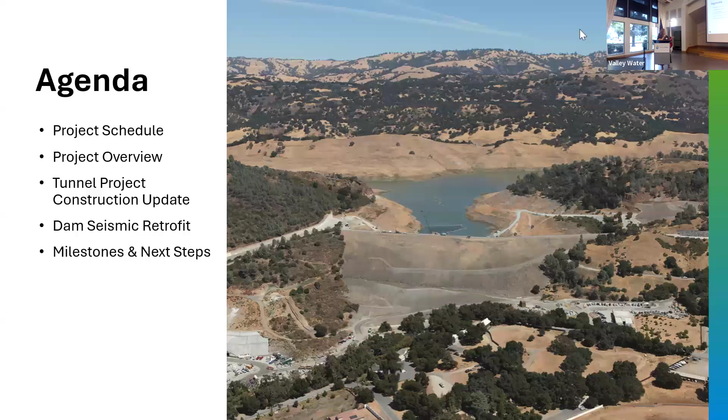Thinking about that delay. Yeah.

Okay, so this is a great slide to start off with. It helps illustrate the various projects and their relationship. It's also a great slide to start off with because it gets a lot of the acronyms out of the way very early in the presentation. And we really love acronyms on this project. We love acronyms so much we put acronyms in acronyms. So starting on the right, we have this grouping. This is the FERC Order Compliance Projects. That's that acronym within an acronym.

FERC, which is the Federal Energy Regulatory Commission. They have jurisdiction over Anderson Dam due to a hydroelectric facility that was constructed in the 80s. So in 2020, they issued an order to Valley Water to drain Anderson Dam, and that's below the 60% capacity that was already restricted to by the state. And we were also required to construct our tunnel project as quickly as possible. And that's how we got the Anderson Dam Tunnel Project.

We had to break that out from our main seismic retrofit project. And that's the project that you see in construction now. So when you're driving on Cochrane Road and you see construction, that's the Anderson Dam Tunnel Project, or ADTP, as we like to call it. Next, we have the Coyote Creek Flood Management Measures. In advance of ADTP being completed, we need to prepare Coyote Creek to receive additional capacity in areas that would have been susceptible to flooding.

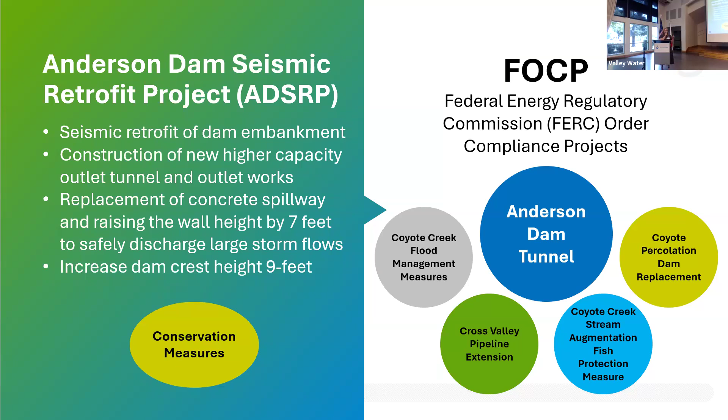So this is a summary of our program schedules for those various projects, starting in 2013 with the design of Anderson Dam. And the star represents today's date along with that vertical line. Of course, in 2020, that's when we had that major shift where we had to break out all of those projects for FOCP, including the new tunnel project, which was broken out of the ADSRP project. So since we last presented to you in February at our last public meeting, the Coyote Percolation Dam project, the Coyote Creek Flood Management Measures project, and the Cross Valley project have all completed construction and have wrapped up. So that's major progress. And the Chillers project will be completed in early 2026, and the Anderson Dam Tunnel Project will be completed in November of 2026.

So focusing on ADSRP, we're moving through our procurement process. We pre-qualified 3 construction contractors that specialize in dam construction. And next week on Tuesday, we'll be going to the board to ask for authorization to invite those 3 contractors to bid on our construction contract. So that's major news. That's a huge milestone for the project. And what that means is that we've wrapped up our final design and we've submitted our bid package. So you see the design moves past today's date, and the reason for that is we anticipate that the contractors will have questions about the design that our designers will have to respond to. So we plan to award the construction contract in July of 2026. We'll start construction in January 2027, and construction will wrap up in December of 2033.

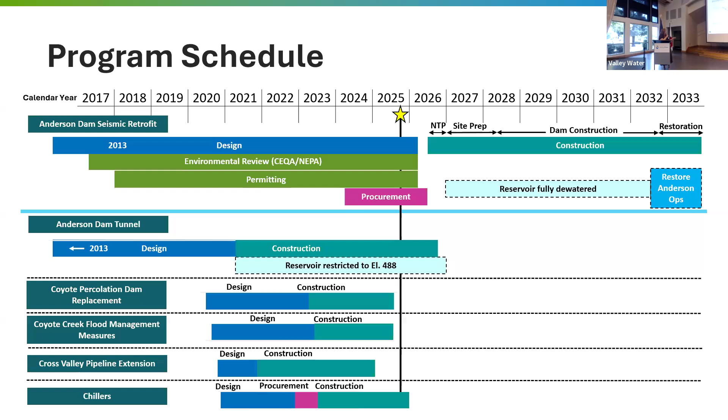So this graphic illustrates the major components of ADSRP that I've already explained. In the center, that full figure is the replacement embankment dam. And the reason why we're replacing that is because when it was built in the 1950s, it was built using liquefiable material in the upstream slope and foundation.

So in the event of an earthquake, it has the potential to experience liquefaction and settle. And if the reservoir were full, it could potentially overtop. And because this is an earthen dam, it has the potential to experience erosion and potentially experience catastrophic failure. So that's why we're replacing the dam. And I will walk you through what that construction sequence looks like later on in this presentation.

The top of the slide is our spillway that is being extended through the unlined portion. That'll be the higher capacity spillway. We also have 2 new independent outlet work systems in the blue and purple that will be able to move water out of Anderson Dam. The low-level outlet work system is our primary system. We'll be able to use that to move water both into the reservoir and out of the reservoir. We'll also be able to use that to put water into Coyote Creek as well as our water supply system. The high-level outlet works will be used for emergency drawdown.

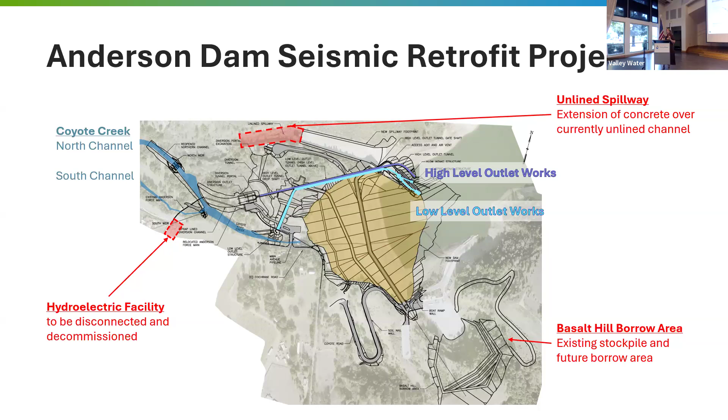At the bottom is our Basalt Hill borrow area. That will be our main supply for material to construct the dam, in addition to the actual dam itself. We have the hydroelectric facility here. This will be decommissioned because we are getting out of the power business for a water company.

Okay. So this slide shows the main components of the Anderson Dam Tunnel project. See how it aligns very closely with the Anderson Dam Seismic Retrofit project. I'll walk you through these components and let you know which ones have already been constructed. So in green is the intake trash rack. That has already been constructed. In blue is the lake tap, which was installed with a microtunnel boring machine. That has already been constructed.

The red is the tunnel. That has been excavated, but we're still working on the final lining. Same with the high-level outlet works in yellow. That has been excavated, but we're still working on the final lining. And the outlet structure in purple, that's that big concrete box when you're driving by. That's been constructed, but the pipes have not been installed. In brown up at the top, that's the North Channel Weir. That was completed last summer.

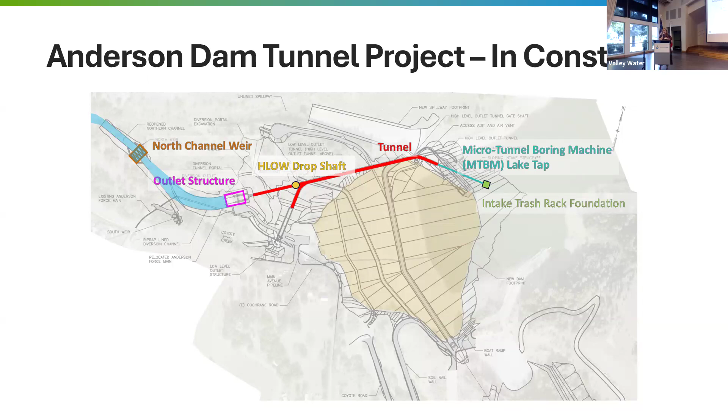So this is our stage 1 diversion system. This is the same thing that you just saw, but in a profile view. So I'll walk you through this. We're going to have corresponding construction photos to each segment here. So our blue lake tap 8-foot diameter pipe, we actually added an extension onto this that's going to be backfilled with a low density concrete. And the reason why we added this extension on is because we're actually going to realign this during ADSRP. So we didn't want to make it harder for us to excavate this during ADSRP.

In red is our tunnel area. This will be our low level outlet works in ADSRP. We're installing articulated joints here. And what those are is, in the event an earthquake causes fault offset in the tunnel, they'll be able to move independently of each other. So during ADSRP, we'll be installing the water carrier pipe. It's 5 and 10 foot segment joints that are able to move around the pipe in the event there's an earthquake. So it'll be able to protect the pipe and keep the pipe intact.

Next, we have our 13-foot diameter steel pipe. And that 13-foot diameter steel pipe bifurcates into 2 11-foot diameter pipes that discharge to the purple diversion outlet structure, where it dissipates this energy and then flows to Coyote Creek.

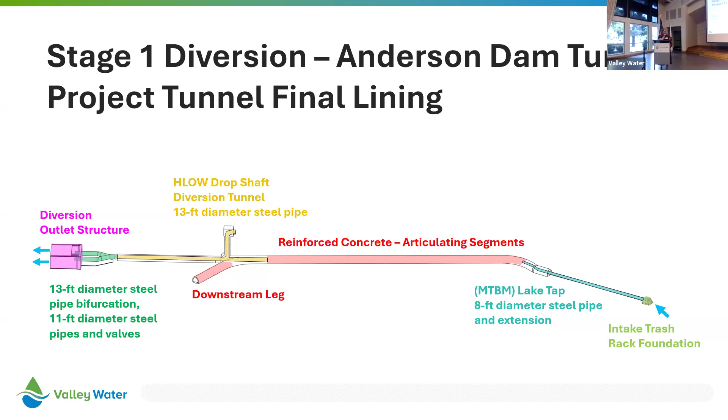So these are the construction photos. So this is the 8-foot diameter pipe before it was backfilled with the low density concrete. And the reason why we use low density concrete is because we are excavating it during ADSRP and we don't want to make it harder for ourselves.

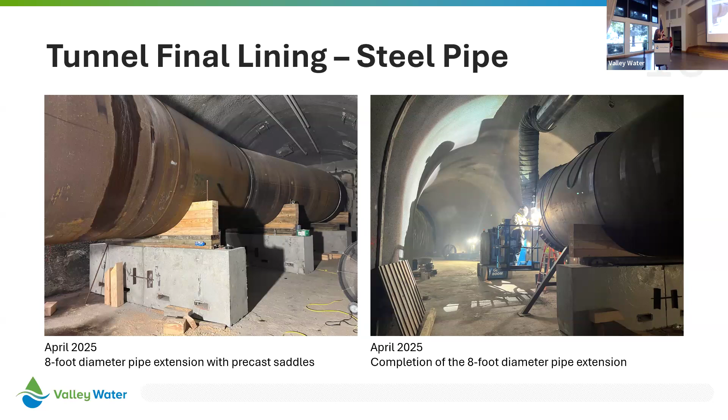So this is the same on the left-hand side. This is the same 8-foot diameter pipe, just looking the opposite direction. Up at the top, you see a yellow membrane. That is our waterproofing. And the reason for that is to prevent groundwater from draining into our tunnel. Down at the bottom of the picture, you can see placement of our reinforcing steel before concrete was placed.

And to the left is our 13-foot diameter steel pipe, and it is quite large. That is one of our inspectors that is standing in the pipe. So you can really get a sense of just how much water is going to be flowing through those pipes. Those supports that you see in the center, those are temporary. Those are called stoling. And the purpose of those is to help keep the shape of the pipe during transportation.

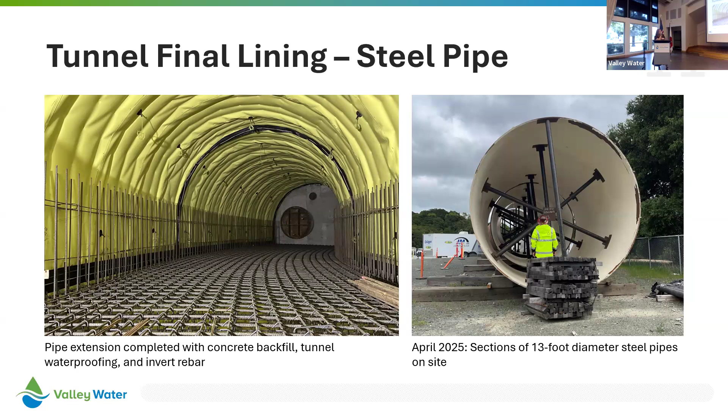So these are our articulated joint segments. You can see just how much rebar is there. This is before concrete is placed. And the purpose for that is we want them to be as strong as possible. So the actual joints themselves are made up of a ton of rebar and very, very strong concrete. And then in between the joints is a very, very weak material. So in the event of an earthquake, the actual material in between the joints would rupture, but the joints themselves would stay intact.

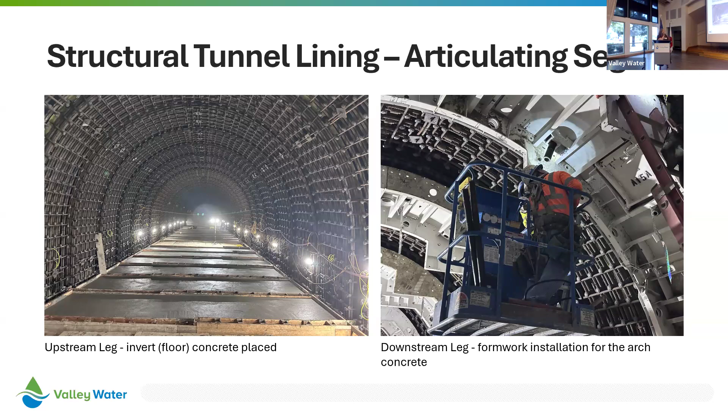This is also the articulated joints after the concrete had been placed. But I want to highlight the formwork in this photo. So it's called an Everest Traveler form, and it's a really efficient system and allows the contractor to place concrete very quickly. So essentially, they're able to place concrete. The form helps form the concrete in the shape of our tunnel. And once the concrete's hardened, they're able to move the formwork to the next segment.

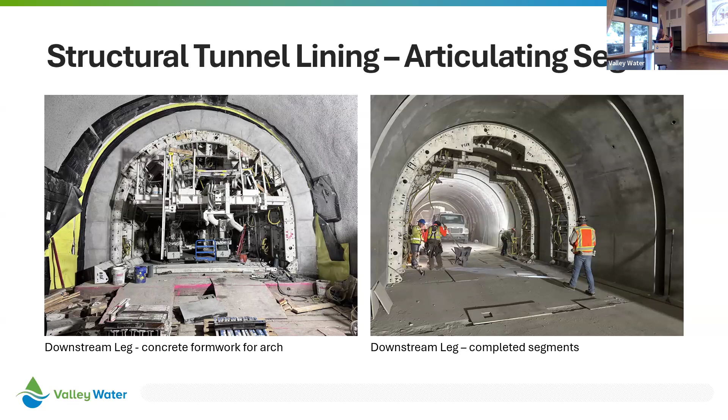So on the left, you see the form with the traveler underneath it. And on the right, you see the form without the traveler. So they're able to quickly move the formwork, and it's a really efficient system. This is an aerial image of our north channel. The structure that has the zigzag pattern is our north channel labyrinth here. And this is where the majority of our flows will go at the end of construction of ADTP.

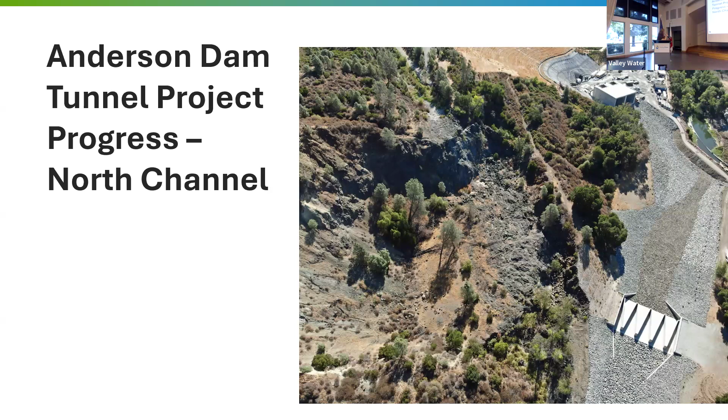So moving back to the seismic retrofit project. We've already talked about the main components of ADSRP. We've talked about the new seismically stable dam. We've talked about the higher capacity spillway and the new outlet work systems. But there are some features that you might be interested in as an everyday park user. So at the end of construction, that's what this figure is. This is what the final configuration will look like.

The upper parking lot will be expanded, so there'll be additional parking up at the top of the dam, and large parking spaces too for boats. We're gonna be replacing the boat ramp and the floating dock. We're also gonna have a new ADA ramp that leads to the floating dock. We're also gonna be refurbishing the bathroom up at the top. The entrance to the park is gonna be reconfigured. We're gonna have a new entrance kiosk. We're gonna have a new inspection kiosk.

And the entrance has been configured so that the traffic can move off of Cochrane and queue off of Cochrane while waiting to enter into the park. We're also widening the roadway up to the top. We're also widening Cochrane Road. So anyone who's driven Cochrane Road knows that blind sharp turn at the end of the dam. We're going to be widening that. Live Oak Park, at the end of the project, we're going to be restoring that park. We're going to have new picnic areas, new shade structures, new trails. We're also going to reestablish the old Serpentine Trail.

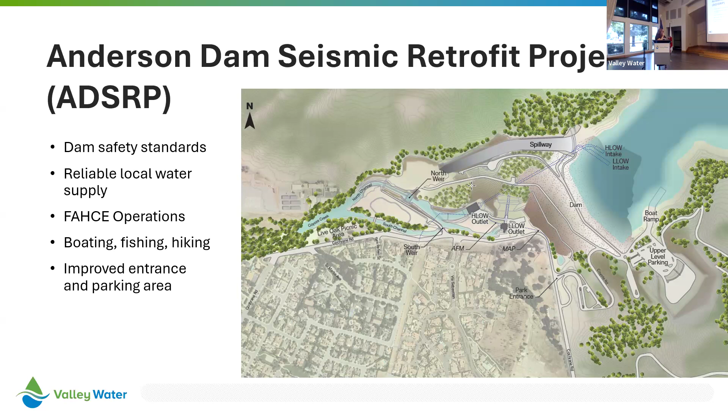So I'm going to walk you through the construction sequencing of the embankment dam. It will take us 5 years to actually build the new dam. That is 2.5 years of excavation and 2.5 years of fill. That's going to start in year 2 of construction. So there's only so much material you can move in 1 year or 1 season of construction. Our season starts in April and it goes to November.

We'll be starting in year 2, you can see right there, that's our first interim dam. In year 2, we bring it down. Year 2, we excavate, year 3, and in year 4 is when we hit foundation in our remnant core. Year 4, we also start to come back up again. Year 5, we also come back up. By year 6, we'll have a new dam that is built with modern design standards and construction standards.

At the end of each season, we're going to be installing a temporary spillway on each interim dam, and that is to prevent erosion in the event of overtopping. That spillway will be built out of articulated concrete blocks, and they'll be installed in like a mat configuration.

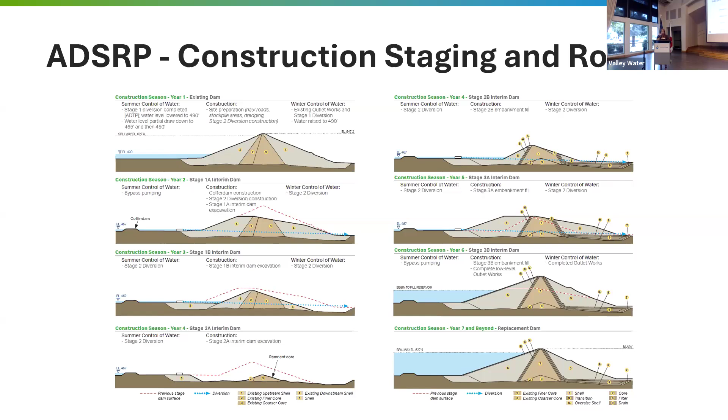So all the material to build the dam will be sourced from on-site with the exception of the filter and drain material. So it's going to be sourced from our existing dam, it's going to be sourced from the Basalt Hill Borrow area, and it's going to be sourced from the Packwood Gravel Borrow Pit. Don't believe that name, that's where we're getting our clay core from. We're not getting any gravel from there. Very mislabeled. So you can see those, they're here in gold.

And in order to keep our construction duration to 5 years, we have to be able to stage all of that material inside the reservoir in stockpile areas. And that is shown here in blue. This is where all of our stockpiles will be. And they're connected by a series of culverts. So we need to be able to stage them as close to the embankment construction as possible, but in areas that are on terrace deposits, so they sit up above the actual water.

So this is our intake tower. We had kind of an opportunity for a last minute design change. An intake tower was originally ruled out due to concerns about fault locations, and our intake structure design was for a sloping intake structure, which is like this big behemoth structure that took a lot of concrete with a lot of grading. It was this massive structure.

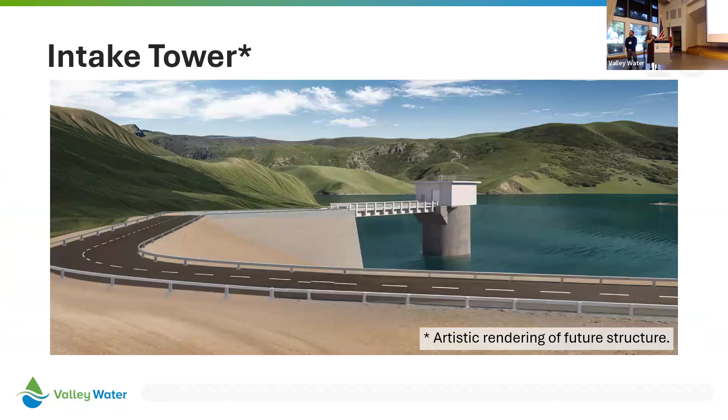The reason why Rosendin Park is closed off is because we're gonna be blasting in the basalt hill. I can show you a slide of what that was. Taking some of that hillside at the end of Rosendin Park and using that material, which is the reason there's a parking lot at the boat ramp, that was part of the original material for the original dam. So this is Rosendin Park right here. This is our basalt hill borrow area.

And it's made of a fairly hard basalt rock, and the only way to excavate that is with blasting. So the contractor will excavate as much as possible using conventional means, but once they get to rock that's too hard to excavate, they'll have to blast. So the reason why we will close it is because the contractor has to start blasting, and it's for public safety because there's the potential for fly rock.

How many years does blasting take? So blasting would occur only in years 4, 5, and 6, but depending on the contractor's schedule, it could be less. So we would only close it when the contractor's blasting. Somebody might go down by accident. Or you have it gated off. Signs.

I'm just concerned because our community up there... closed for 3 years. I would like it to make sense to me. The partial closure, is that right? It's not the entire park?

So it's a full closure during the initial blasting, which is the very, very top, which is where you have the risk of the furthest distribution of fly rock. And then it's a partial closure during the majority of the excavation. So we anticipate initial blasting would last about 3 to 4 months.

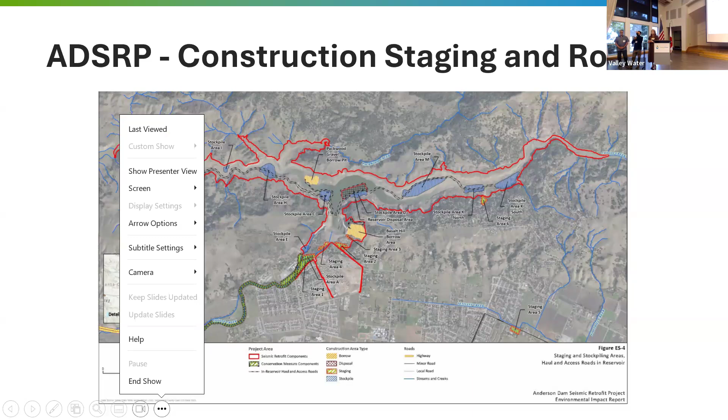Where does the imported water come from to replace the water that is no longer in the reservoir, and how much does that cost? So the imported water that makes its way to Anderson, I'm sure most of you have driven over 152 and gone past San Luis Reservoir. So we bring in our federal Central Valley Project water mostly into the reservoir and it makes its way all the way through the conduit into the reservoir.

So that water is a fixed cost. Valley Water already has those contracts annually, both their State Water Project and Central Valley Project water. So right now, with Anderson being down, we actually have to find other places to put it, other places to use it. So that's a fixed cost. Those contracts have been in place since the 70s and are extended through for the next however many decades. So the imported water supply is a fixed cost for Valley. Our county gets about 40% of its water through that process every year.

No, there's pipelines connecting San Luis Reservoir, and that's often how we fill Anderson during dry years, is we can pump the water into it.

Short question, long question. Short question, what is a weir, W-E-I-R? Longer question has to do with the amount of construction truck traffic within the project area. Are you moving material around by truck, or at one point you were talking about maybe using a conveyor belt? And for the material that comes in from outside the project area, other than the concrete that was just mentioned, what kind of trucks are we gonna experience there? Thank you.